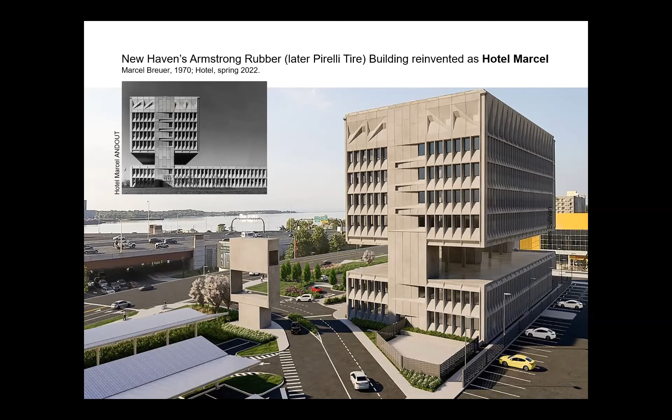Down in New Haven, the Pirelli, as it was known—it was the Armstrong Rubber building, then the Pirelli Tire building—vacant for at least 20 years, has been reinvented as the Hotel Marcel. I can't wait to visit. It was named Marcel after the architect Marcel Breuer. The space between the upper and lower was ostensibly to divide the administrative corporate offices from other functions, but it also, as you can see with the raised highway, the expressway, allowed view through, because that was the level of New Haven with its highway systems coming through. As commentators and historians have discussed, it's a different type of brutalism than say the Yale Art and Architecture building—a little more harsh. But in any case, the other amazing news is that the hotel is net zero. It's got solar panels on the roof that supply all of its power, and enough to actually at times sell back to the grid. I love the sculptural quality of it itself.

Who's doing the redevelopment? Let's see. Well, I know the architectural firm was Becker—Bruce Redmond Becker. That works. I'm just looking at the Globe story, I don't recall it mentioning the development team. I probably should have, but anyway, they're looking for LEED Platinum status and Passive House certification. Some of you guys know much better than I.

Next up was the sale. There was a lot of concern over the last couple of months, and Governor Baker was really fast-tracking selling the Hynes Convention Center, which would help finance expanding the South Boston Exhibition Convention Center. There was news a week or two ago that it's been postponed, and the Senate put the brakes on that, saying let's get it studied and take a look at all the pros and cons. Hopefully that would include saving at least some of the existing meeting space. That's certainly enlivened the Back Bay.

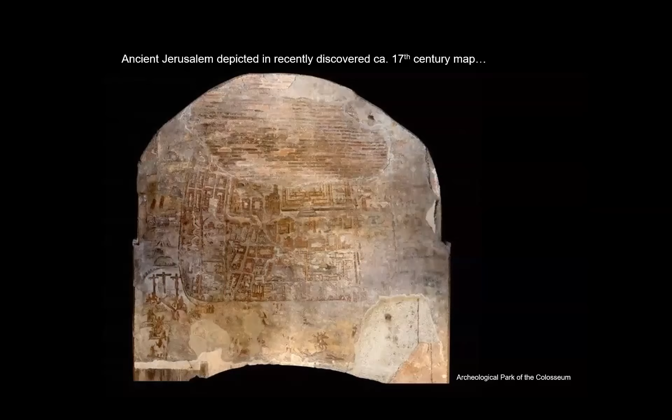From that era, just over a doorway, there was this map that had been so faded no one had noticed it until recently. They think it's from the 17th century, but it shows ancient Jerusalem. From whatever records they had then, it's a map which really reinforces the connection of the Colosseum being used as a sort of holy site of the church.

The cross is there, in the bottom left - isn't that great? Yeah, Calvary. Crosses on the bottom, lower left. So there's some figural aspect to that. I haven't actually looked at how that worked with my recollections of the layout of the city, or which way is north, but that would have been all the old city at that point, I guess.

Anyway, so that's what I have. There are some others, if time permits, but I'm going to stop. We'll stop sharing, but I want to just - that one, not sure what that is. So David, why don't we bring you up. Yes, please.

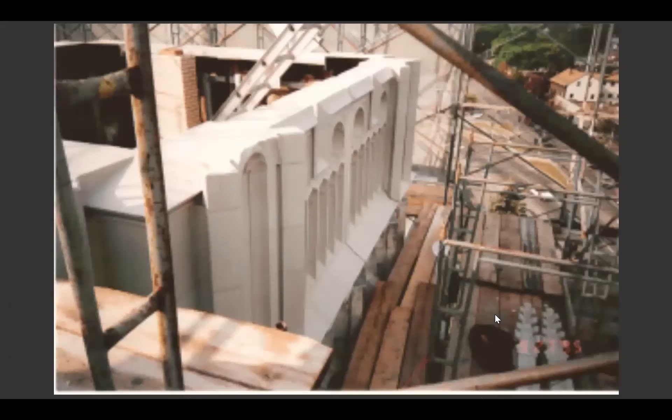And here it is being hoisted up. You might not have known this when you're driving by on the Pike, but this project, which Judy Selwyn oversaw, and Durafiber in New Hampshire built, recreated everything above the gutter line in GFRP, with the rest being masonry. So that's a really good use, and I use that as an example for my next project.

Now, this building everybody knows. Do you know what the framework is? Up in there, there's some steel framing mounted to the masonry. But otherwise, those pinnacles are self-standing.

See these pieces in the shop? They just get screwed together very easily. They're very flexible, and they put the joint lines in it.

This building here, notice the bottom, which we saw when I originally moved to Boston, and here it is, the older picture with those pinnacles and balustrade. Notice how it's lost a lot of its character, but with Feingold and Alexander's project and the revitalization of this building, there go the new balustrades cast, and ta-da, there it is, in all its glory, even with the flagpoles.

And where's the company that's doing the casting? This was done by FiberTech in Greenville, South Carolina, which did the GFRP work on that. I talked to Mr. Alexander about this, and he lent me these photos to show.

This is another one of their projects. This is the postcard of the Worcester train station, which looked sad and highly pixelated before the renaissance of this building happened.

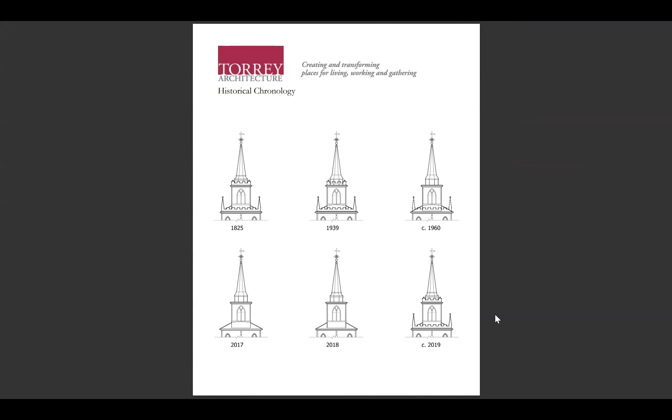In that 2018 version, we decided that if you're going to rebuild and recover it, don't just strip the shingles and put more shingles on — that's going to require constant maintenance. Let's do GFRP. Notice the spire framing goes right through, and that was in pretty good shape. So what happened was, notice the spire framing and shafting going through.

So we designed the drum and the spire in the original curved transition shape. They stripped the thing and then carefully dropped this cap over the top of the original framing, including the weather vane rod. Dura Fiber helped us with this project, and American Steeple were the guys who got that on there. That was First Parish, Canton, Mass, and that's the first phase of restoring.

On a much smaller scale, here's a balustrade at an entrance to a house in Hingham. Actually, it was relocated to Hingham as a historic sea captain's house. Notice the little balustrade, those turned balusters over the entrance. When we got to this house in Hingham, the balustrade on the roof just looked like a garden gate fence — inappropriate and inaccurate.

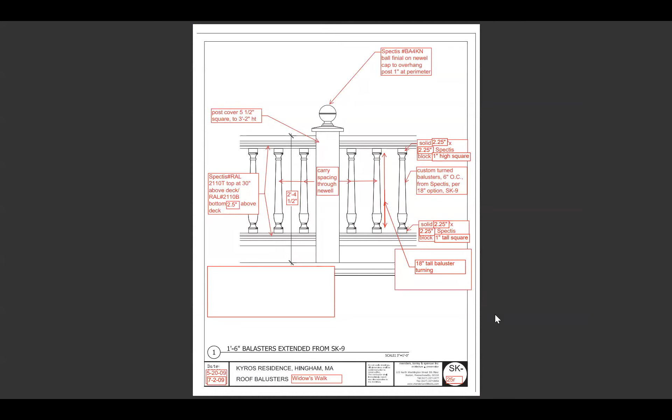So we went back to historic documents, and we also took the dimensions of the balusters that did survive and extrapolated that up, and now the new Widow's Walk in the original design has the same turned balusters. This is in Spectis, which is a form of plastic. They're custom-made balusters, and it's pretty easy — you make a mold and you make a lot of them.

Within Susan Scher's compendium of what would have been the conference, there was a preservation brief we should all know about, number 16, use of substitute materials, and it has several pages. The bottom half of this page is the fiber reinforced polymers page — advantages, disadvantages.

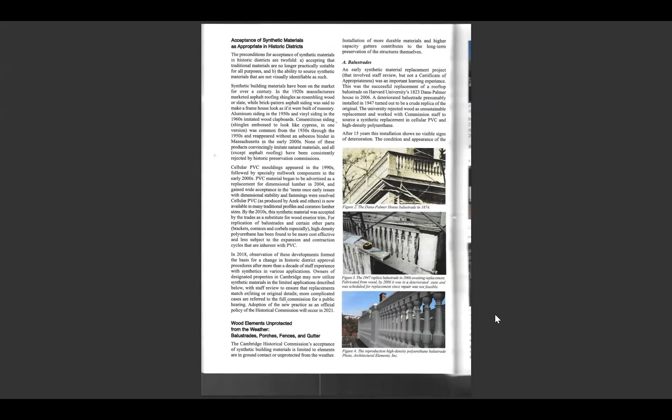In the same book, Charles Sullivan, director of the Cambridge Historical Commission, wrote a piece — and you might think historical commissions are totally against using non-original materials — but he has a piece showing the wood grain of old white pine and new white pine at the bottom of the page, and issues with these things. Do you ever try to find an original balustrade on a colonial house? It's really hard to find them because of all those reasons.

But historical commissions are able to approve them — for instance, there's the gutter profiles. You can get a fiberglass gutter that holds a lot more water, has the same exact profile, and doesn't rot.

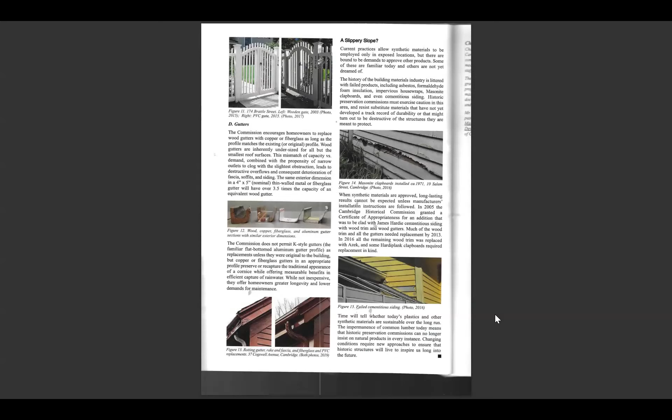Isaiah Rogers in 1833 designed First Parish using high-tech bandsaws in wood. In 1833, old-growth wood was a plentiful resource in New England, and skilled craftsmen were able to saw it into boards and piece it together into forms evocative of stone. Early Gothic Revival did not rigorously copy carved stone European Gothic examples, as did later 19th-century work by, say, Viollet-le-Duc.

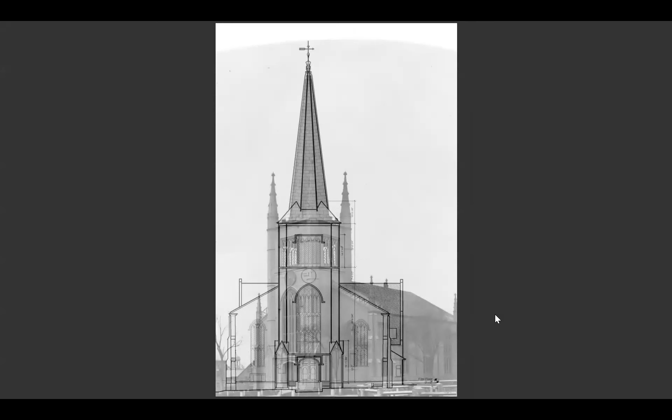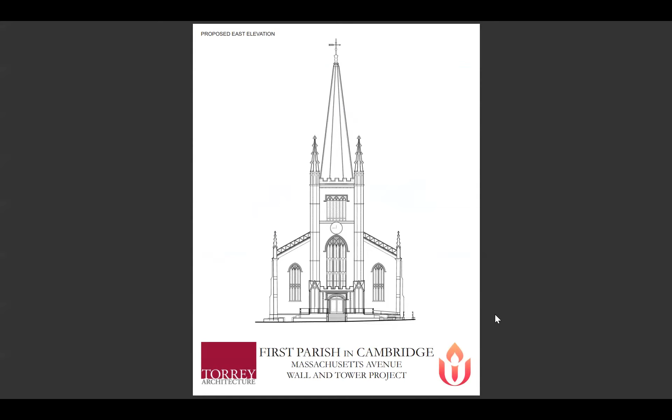But a lot of it remained. So first we had existing conditions come out and do their laser scanning. For the first time, we can actually measure the dimensions, overlay on a 3D model, and carefully recreate the entire building in CAD as it was, accurately enough to be approved by Charles Sullivan and the Cambridge Historical Commission to go ahead with this project, which combines accessibility, a new entrance door with ramps, and restoring the original building to its former glory.

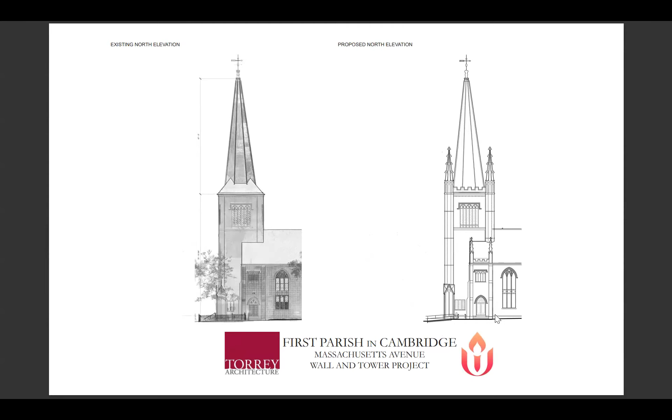Notice the strength of the tower with those four corner buttresses rather than this sleek, thin thing. You can see where they lopped them off. There's lines lifted over. So we were able to compare photos and three-dimensional modeling and actually draw this thing to be restored.

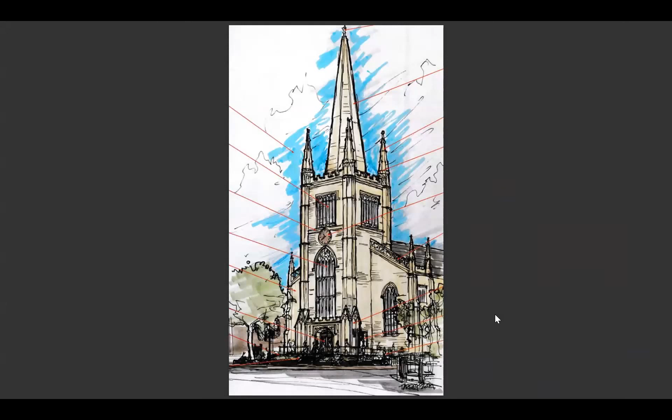All it takes is a thin armature, and you strap this skin onto an armature. We think it would make quite a wonderful return to the skyline of Harvard Square. That's the story of that project, and so we're looking for funding.

Bravo. Yeah, very exciting. All right, it's a great presentation, very interesting. Thank you. Very.

Shall I go? I just want to jump back on because I had some of the projects that's sort of inspired by, well, all right. I was sort of inspired by David's work. There was a little church, a little thing I did that I wanted to show, but okay. Thank you, I guess, Matt. Matthew, stop the share. Yeah, Jack, did you want me to go? I've got a hard stop at 9, or do you want to go now? Oh, I see. Yep, carry on. Yeah, Matthew, okay, why don't you share? I forgot about that. Thanks.

Okay, for reminding me. So I just wanted to share my rather geeky love of stone paving and talk a little bit about that. So historic stone street paving. Can everyone hear me okay? Yeah, great. Okay.

So, the trajectory of my own geeky love of this: years ago in the late 80s, I was educated as a civil engineer and worked as a highway engineer for my first couple years out of school, mostly assessing and designing repaving projects on the Mass Turnpike. Then since I joined SGH in the mid-90s till now, I've done a lot of stone paving design over the years, although most of it hasn't been vehicular. It's mostly been pedestrian or occasionally light vehicular, a lot of university and college plazas, terraces, and balconies.

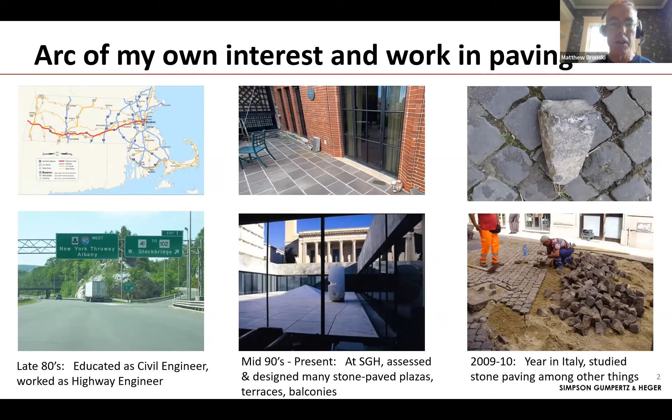During that time, about a dozen years ago, when I spent a year in Italy as part of independent studies, I looked at a lot of different stone pavings. There were just so many different systems in the streets of Rome and surrounding towns and piazzas. So that was a fun way for me to geek out while I was there.

There are other types of paving you see in other parts of the world. But a couple summers ago, I had the good fortune to really dive into this love and do a little study in the summer on the historic cobblestone Main Street in Nantucket Island.

Over the years there had been periods of ups and downs where they spent very little on the streets, the cobbles were really well laid, maintenance costs were really low, and they were bragging about how little it cost compared to bituminous. Alternating with times when they were just complaining: oh, these cobblestone streets have got to go, they're such a pain, no one can keep them up, no one knows how to deal with them anymore.

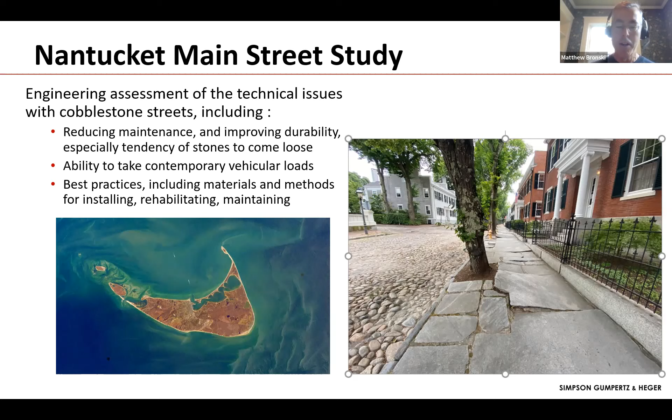They're kind of at the end of a down period now—hearing a lot of these complaints, with people wondering, gee, is it really practical to keep these streets up, et cetera.

Part of this was on-site assessment, and part was technical literature search. One interesting thing is that in the period from about 1870 to 1910, there was really good engineering research and publications coming out of US universities, and also Italian, English, Irish, on how you really do stone pavings and make them hold up to vehicular loads. This was in an age before bituminous concrete pavements were widespread, so that's really where the engineering research of the day was going.

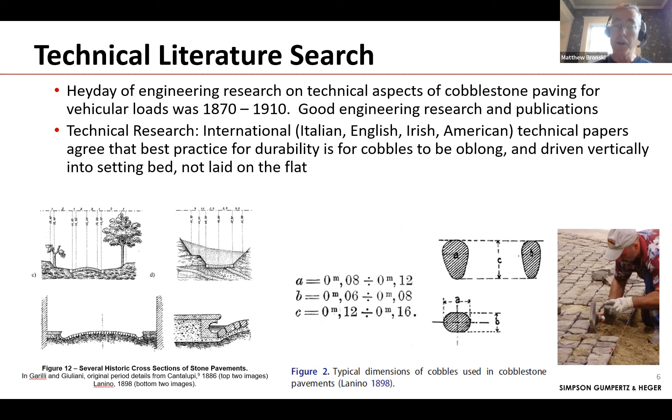There are some great publications—I'm showing a couple of Italian examples here, looking at the ideal dimensions and aspect ratios even for cobbles you're picking up out of the ground, carefully selecting the ones that will work best, and how to set these.

This was from a more recent English paper where they reset the cobble paving at Radcliffe Square, Oxford. It had failed pretty badly. They reset it improperly at first, then realized that people had been laying those stones—imagine the ones on the right are kind of baked-potato shaped—laying them flat instead of driving them in vertically. From everything I'd seen in Italy, and from older properly set cobblestone pavements here in New England, that's how you have to install them: driven in vertically, with every cobble tight to the one around it.

So even though you don't see that on the surface, subsurface they're all in contact. So wheel load on one, especially as a wheel is spinning and it's trying to torque that cobble out of the ground, if they're in isolation, if they have sand or mortar all around them, that one stone is the only one resisting that force. But if they're all in contact with each other, it gets spread to the 5 or 6 adjacent to it, and then the 10 or 12 adjacent to that, and those stresses are distributed over a much larger area.

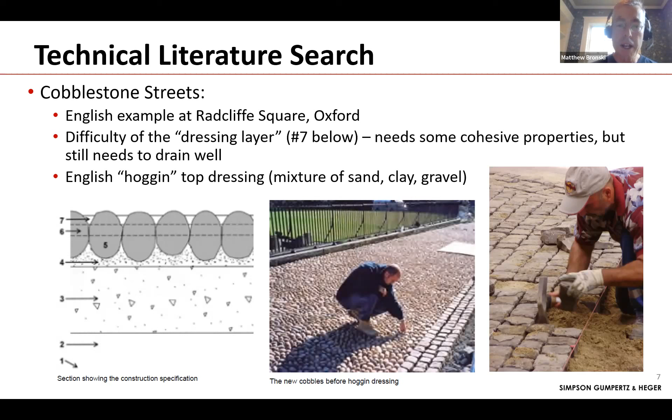Typically they've used a mixture of sand, clay, and gravel - materials and soils that we would define as a mixture of cohesive materials like clay with non-cohesive materials like sand. The non-cohesive materials drain better, but the cohesive materials hold together better. So they're creating the Goldilocks material, the perfect material, out of combining those cohesive and non-cohesive materials.

Traditionally what was used on Nantucket was their local dirty sand. What you mean by dirty is it isn't just washed clean sand like you would get at the beach. It's the sand that you dig a hole in Nantucket and you find this everywhere - sand that's actually mixed and combined with some amount of clay or silt.

Digging back into these turn of the century volumes and engineering research, that's exactly what they were recommending. Morrison in 1908 and Tillson, a really great handbook from 1900 - these are university professors, I think Tillson was from Columbia in New York City - saying what you really want is loamy sand.

Looking up loamy sand, it's defined on the classic USDA soil triangle. Any soil, what you dig up in your yard or your potting soil, you can simply classify this way. Each of the 3 points would be 100% of either sand, clay, or silt, and then any point on that triangle is some combination of those.

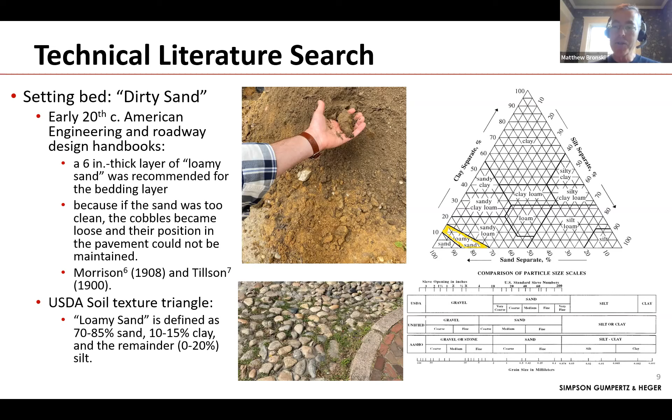So looking up, what did loamy sand mean in 1900 or 1908? Well, it was essentially 70 to 85% sand, 10 to 15% clay, and the remainder, if any, 0 to 20% was silt. So again, it's mostly sand because drainage is really important in roads, but it's enough of the cohesive stuff to hold it together and stick it together. And that helps make it compactable as well, which is a key thing.

Some of the problems on Nantucket on Main Street where they've had issues - you can see their detail here from some of their recent specifications for the town are actually pretty good. They're showing them like baked potatoes or molars, driven in vertically like they should be. They even show them touching, so the spec looks pretty good.

They're using stone dust instead of a dirty sand. Stone dust compacts really well, but it does not drain well. And they weren't really installing it this way - you can see over here on the left where they've had all these cobbles spun out. First of all, they're not always picking the right ones.

It should be like a baked potato, it shouldn't be shaped like a cantaloupe. A lot of these are just perfectly spherical, and those tend to spin out. In the top photo, you can see this is an older area that was set really well and that's held up really well. Actually a lot of these are flat topped, which they used to find on the island - they knew exactly where to get the long stones that were flat topped.

On the bottom, this more looks like a sea of icebergs. So not only does it look terrible and non-historic because the stone to fill ratio is way off, but just by looking at that, you can see that subsurface, these aren't going to be in contact, right?

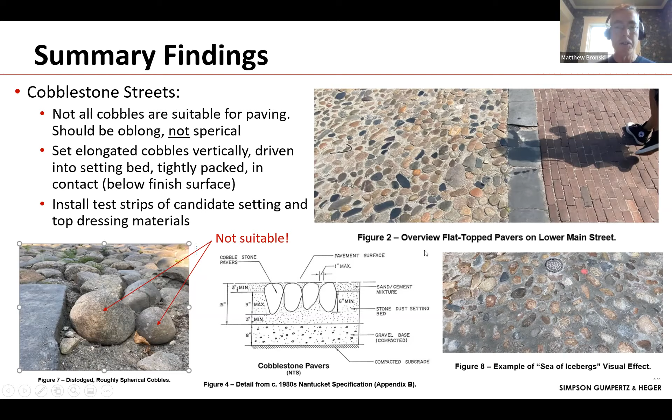So they're going to spin out a lot easier as someone turns their wheel. All the force is going to be isolated on that single stone.

So kind of just to wrap up, my findings down on Nantucket, cobblestone streets, kind of the world of paving and AASHTO and federal highways: all streets, even your local roads, tend to fall into two categories, rigid paving, like concrete, or flexible, like bituminous concrete, which a lot of people would call asphalt, even though asphalt is just the binder in it. And stone streets are really like a hybrid.

They're extremely rigid individual units on the surface, but the joints between them actually give them a lot of the characteristics of a flexible pavement, where it can accommodate subtle areas of settlement and tree roots and things like that, and roll with those punches. And most of all, they're pervious, so that if you pick the right material between them, like a dirty sand as opposed to a stone dust, they really drain water well.

So that's, in my mind, a reason we should be thinking about these today: just the sustainability of having pervious pavements. And they can withstand contemporary vehicular wheel loads. All the research, including the European research, supports that. The surface is actually more rigid than bituminous. The capacity is really all about the subbase, how the subbases are chosen, the layers, and how well they are compacted.

And that's really where the ability to support wheel loads comes from. The most significant load that was displacing cobbles there was really the torque from turning wheels. The absolute worst case is when someone parallel parks, because when you're moving and turning, like slowly taking a left turn, that's not so bad. But when a car is totally stationary, with all the weight sitting there, and someone cranks the wheel really hard to one side to get into or out of a parallel parking spot and the car's not moving, you're concentrating it all on a couple stones, or even a single stone, right underneath the wheel.

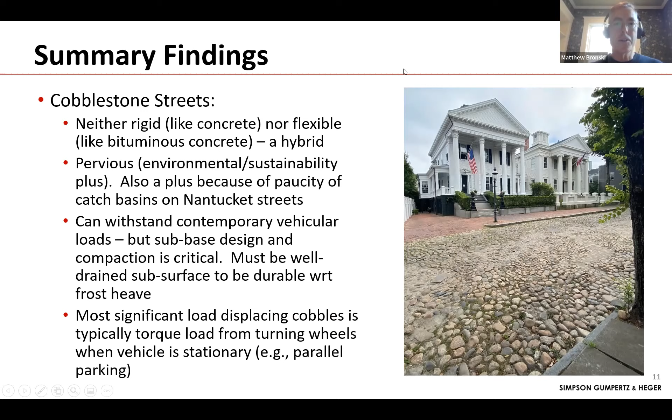So that was it. So I'll stop the share and let you get back to it, Jack.

Great. Thanks, wow, cool. Yeah, just a quick question.

My understanding is that cobbles were often used as ballast aboard ships in the 17th, 18th century. And so in Nantucket, might it be that some of those were— after the load was unloaded, the ballast would be emptied to make up for that. Is it possible some of those were imported? That story persists a lot, and everywhere we keep hearing, oh, these came over as ballast from ships from England or elsewhere. But you look at those stones and they are all just the local New England glacial till. So I think there's a lot of mythology about that. The physical evidence just doesn't support it.

All right. All right, thank you. Well, good to know.

I know that there's a park in Charlestown that has ostensibly cobbles that came off of the ship, but I don't know if that was embellished as well. Yeah, I think if we see flint anywhere, we'll feel pretty good that it probably came over on a ship from England.

All right. So, Dan from AHA, Dan Whittet, you're on. So I'm going to talk a little bit about Lidar scanning of a historic building.

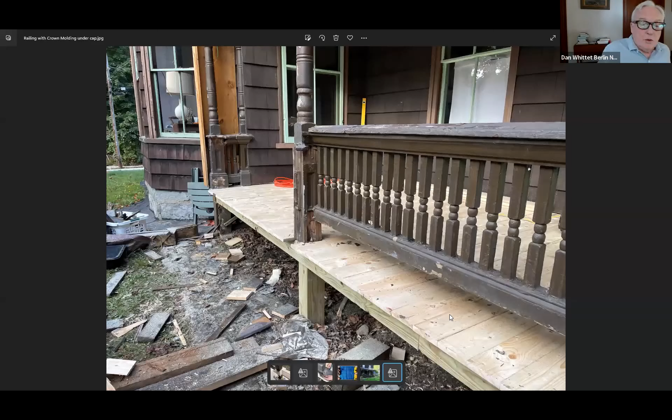So when I got the house, speaking of balustrades, the leftover turnings from this original railing were here. Everything was exactly the way the house had been for 130 years. Do you see that detail there? Yeah.

So I decided that I would apply for historic preservation status for the house, and I wanted to get obviously full measured drawings of the house.

Do you see this 3D model on the screen? No, not yet. I apologize.

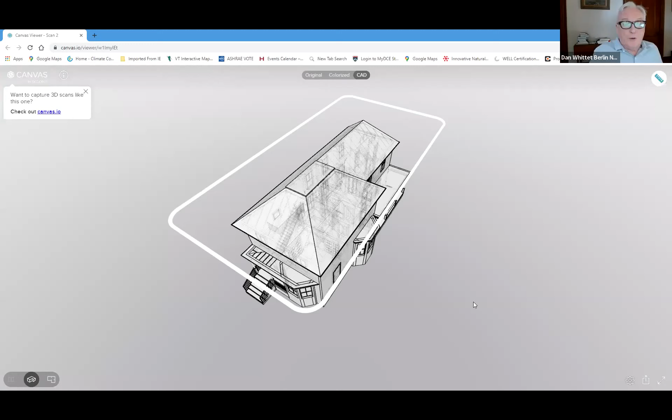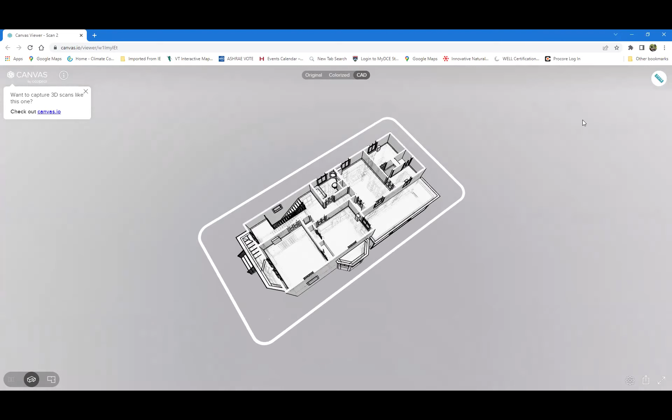So basically if all of you have an iPhone 12 or later, or an iPad, there's an app called Canvas. Canvas allows you to use the Lidar function, which is what does the facial recognition. You walk through a building and do a scan, and then it exports as a point mesh. Then the company, Occipital, will export it back to you for 15 cents a square foot as a full measured drawing. I'm having a little bit of difficulty with my Zoom screen here, but this export allows you to measure, and it's exactly to scale.

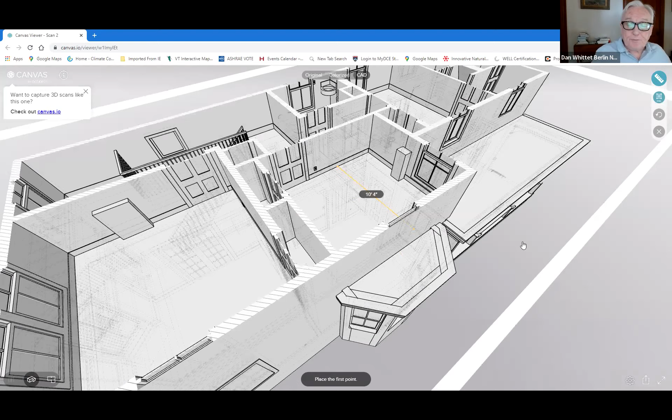That's not really the outstanding part about it, although this was extremely useful to me. And by the way, the app itself is free. Actually behind me, you can see these tall wooden doors - this is the room I'm sitting in. In fact, right behind my head, that's that door right there. This is accurate within about 1/8 to 1/4 of an inch everywhere.

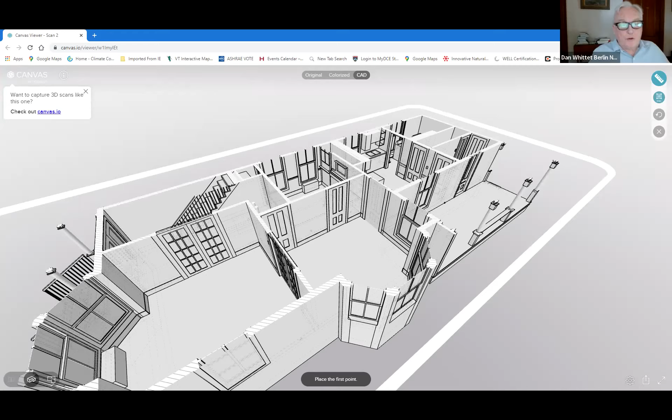I'm going to again try to switch screens. It exports into a Revit file. I'm no great expert with Revit, but you're then able to create from that model a full Revit, AutoCAD, and SketchUp model of the building.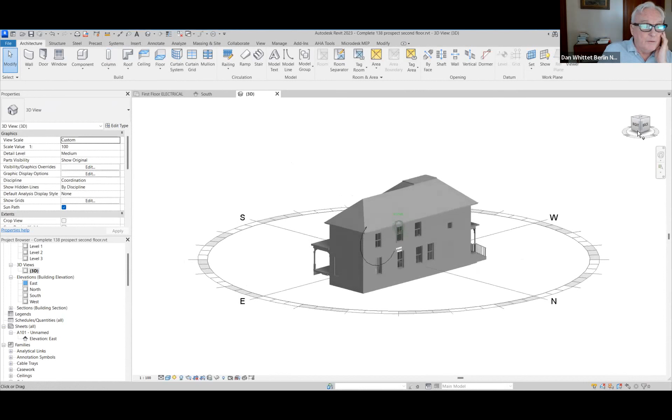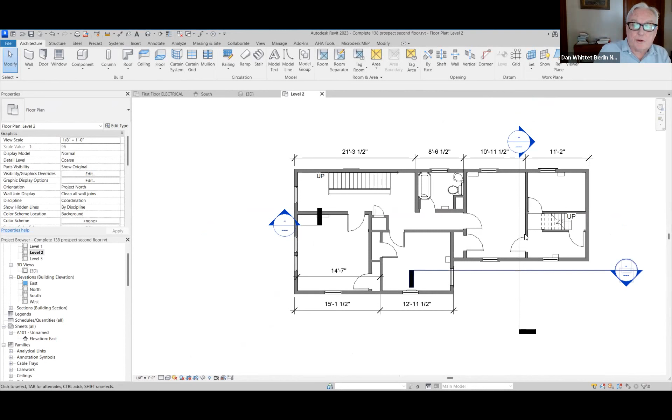I thought, wow, this is really convenient for me, because I want to be able to go through these, and I have photos of the interior, but it's a perfect match to the building as is. In fact, if you think of that original drawing that I showed you, the dimensions all line up. It's a pretty interesting workflow.

What it takes is maybe an hour and a half to walk through the building and do a scan. In fact, I will give you an example of one.

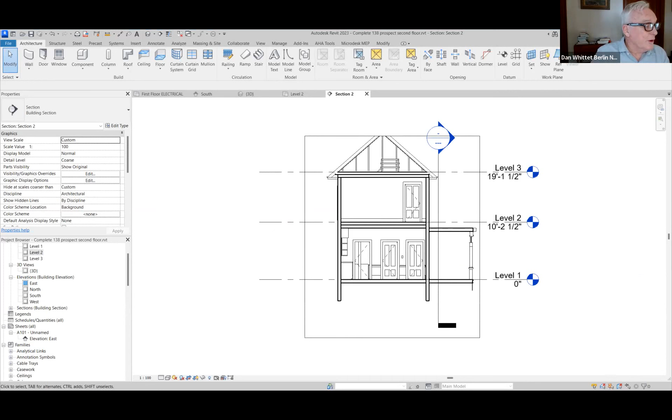By the way, yeah, all the other presentations were fantastic, guys. Thank you. I've been involved with BSA for a decade, and I didn't know this group existed.

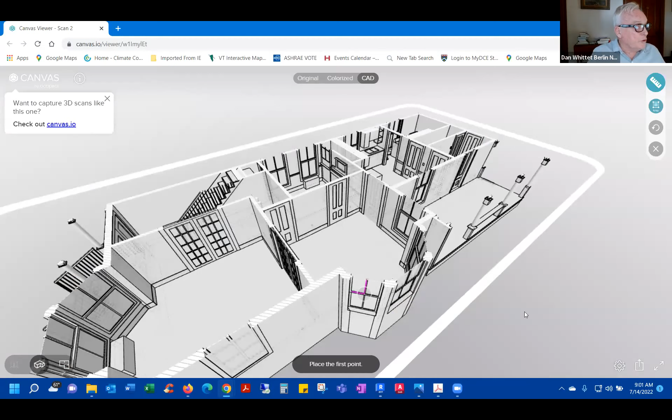I think I know what I need to do - I need to move this to this screen. Now you see the 3D model. It just blew my mind. And there you go - see the mantle in there?

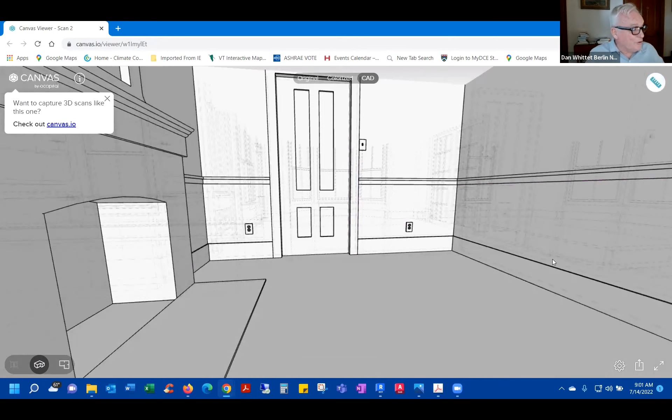Yeah. And in fact, when I came back and field checked this, these are accurate - I mean, the dimension of this outlet is actually in the room. By the way, part of how they're doing this is they take the point mesh, which the Lidar generates, and I could show that to you if you had time to see it. They export it to people in Ukraine, interestingly enough.

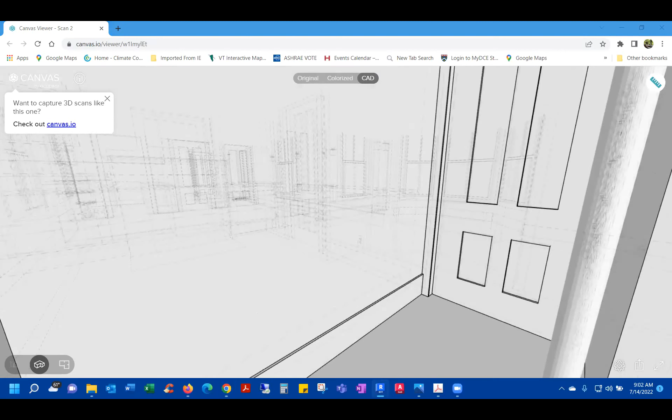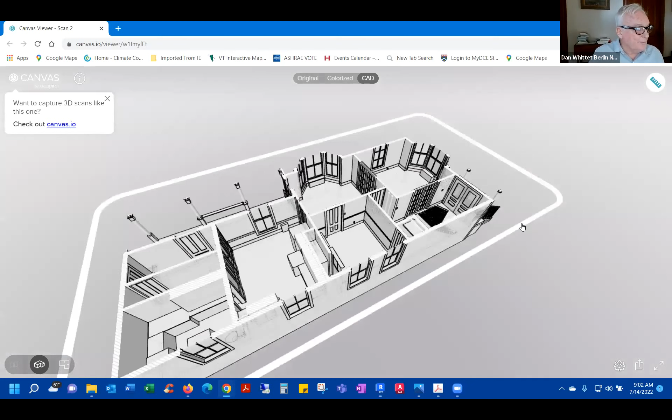And so they're Revit modelers and are very careful about it. I was impressed when I looked at the layout, like I went through the attic, which I used a New Hampshire Saves program to insulate with closed cell foam.

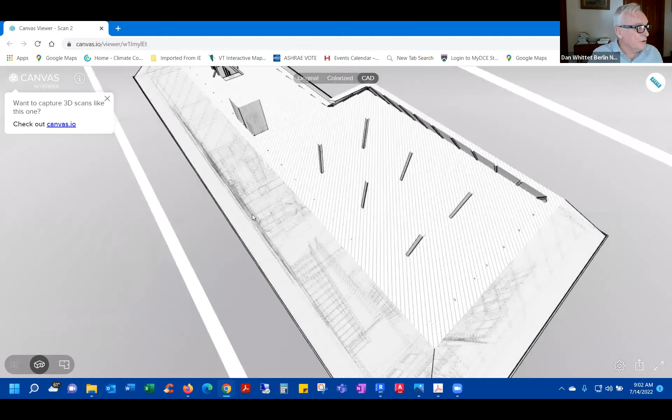I had a photograph for you of this back staircase that will show up here. It's a little tricky moving it around, but you'll see a back staircase there. There's that back staircase, and it came out perfect in the CAD model.

So I think this is a very affordable and very useful tool for making measured drawings of historic structures.

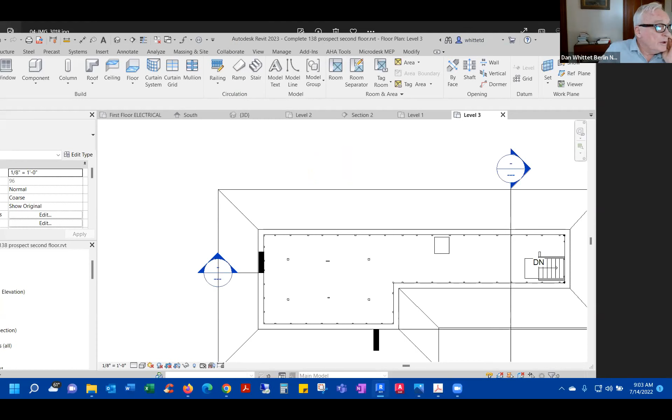Oh, cool, that's Canvas? It's Canvas by Occipital. It also generated, it's not particularly beautiful, and I don't have the SketchUp running, but when they give you the file back, you get Revit, AutoCAD, and SketchUp.

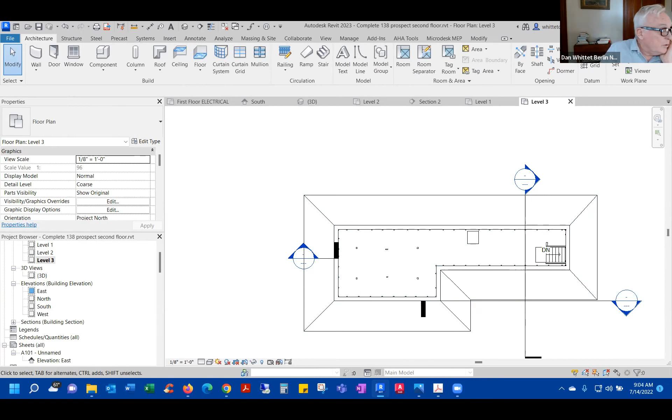And I have links to the company. I spoke to them about this presentation, and they have a... let's see if I can land on this real quick. Sorry, I didn't set this up as a PowerPoint because I wanted it to be dynamic. So this is the company, and they have a whole lot of links on their webpage. I can put a link to this in the chat to talk about the process.

So that's it, other than to tell you that as I hear about things, because I still work for AHA out of the Lexington office, and I'm down in Boston a lot. As a point of interest, I was the lead admin for taking that building that the BSA is in through LEED and getting their LEED Gold certification.

Here's another photograph of that balustrade that's being restored. And thank you for the GFRP presentation, because I'd be tempted to do that, although as a woodworker myself, I enjoy the project of trying to recreate it.

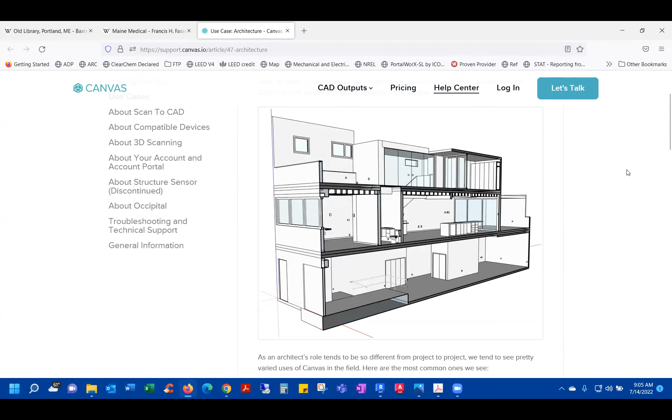Yeah, well, I was all set to go through and measure it and begin drawing, and started to draw it, and then I didn't know how this would work. When I did that scan of the, there's another facet of the building, I thought, well, this is interesting, but it's not that useful. But then when I exported it to them and they sent me back the model, that really is useful.

Particularly being able to get measured drawings, because now I can begin, as you know, with old houses, laying out where you're going to do restoration and where you're going to run wiring that has to be upgraded, things like that. Some of the drawings I saw on the GFRP presentation really impressed me, but to do a full set of measured drawings like that is a really expensive process if you're hiring somebody to do it.

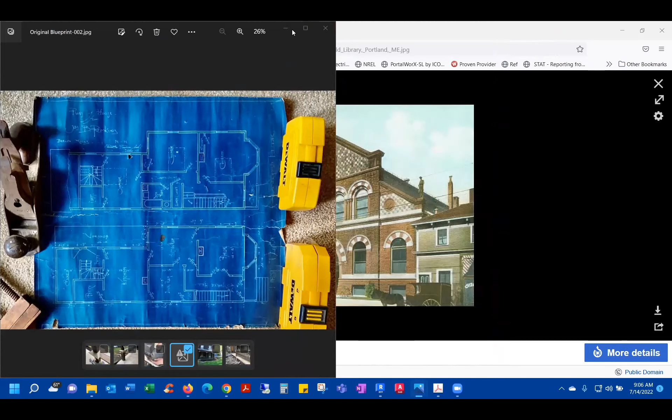Yeah, another benefit for buildings within the national park system that are historic houses. So another benefit is programmatic accessibility, like a house I'm working on in Long Island, the William Floyd Estate.

I'm going to show my model if there's time, but there are lots of level changes in the upstairs. It's not accessible. So a way to make the 300-year-old occupancy of the house, part of its history, is to make all the other rooms accessible to visitors where physically they can't go. So being able to have a detailed model and panning around is a benefit too.

Yeah, it's a really easy to use tool, and the company has been very helpful. I see all kinds of applications. AHA has gone out and purchased an iPad to be dedicated to this so that we can convert it to our BIM files.

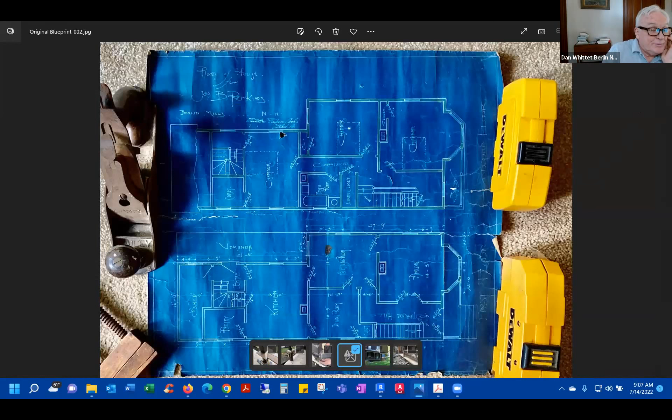Like all of this stuff, when you saw my scanned model, it picked it all up. And by the way, happy to entertain discussions. These are all shellac covered floors, and I'm sure people have lots of opinions on the best way to restore an old house like this, because I do hope to keep it as original as possible.

All right, well, let's keep in touch. Thank you, Dan. That's great, yeah. Sara, do you mind if Susan jumps in, since she has a time crunch, and then we'll go to you, Sara, after.

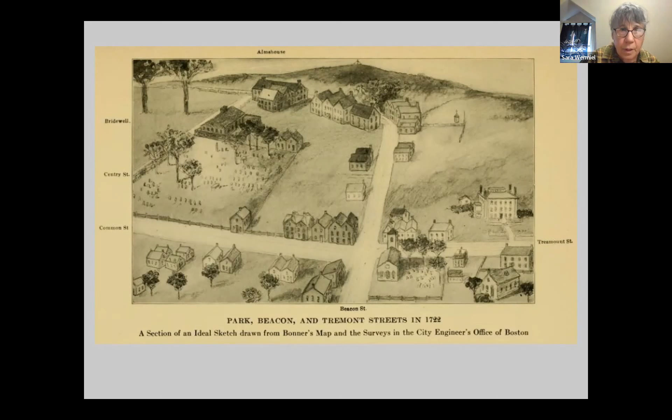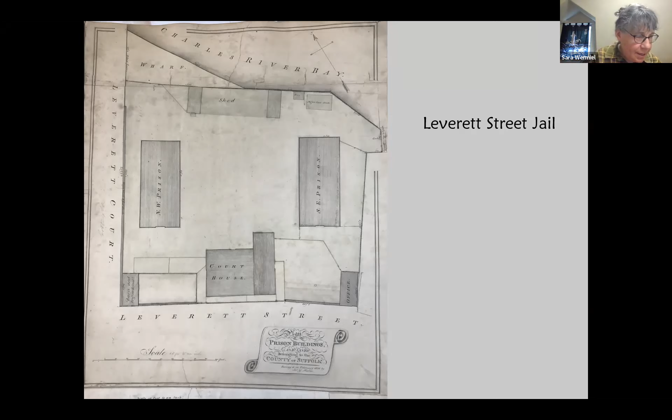Meanwhile, that little decrepit prison on Court Street was replaced with this jail, just down the street from the Alms House on Leverett Street. It consisted of two separate prison buildings with a courthouse and keeper's house in between. One reason there's no drawings or photographic evidence of these buildings surviving into the period of photography is that they weren't publicly accessible, any more than you'd visit and photograph a prison today. They were surrounded by walls, so you couldn't really see them from the street. So they were obscure.

Now, when they demolished the Alms House near the common, and the workhouse, they didn't replace the workhouse. So that whole population moved to the Alms House, which should not have been the case. The Alms House was for the deserving poor, and the workhouse was for the undeserving poor. So the city had no workhouse, and moreover, at this Alms House there really wasn't a place for people to work. So they really needed a new workhouse.

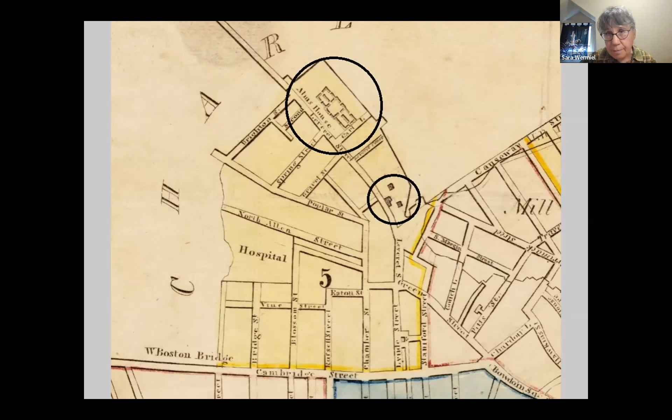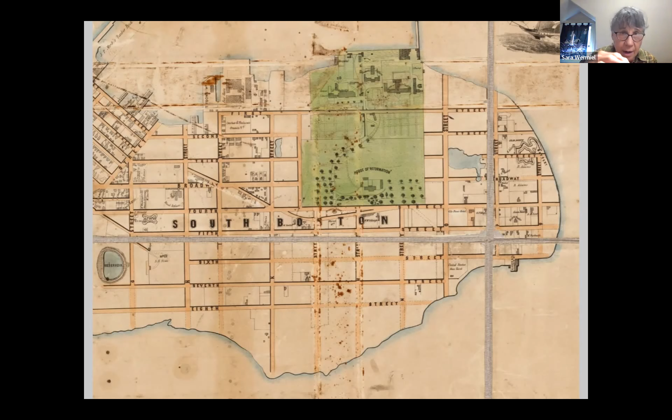Anyway, about 1821-22 the workhouse was built, but eventually other institutions were built, as I'll show you. Four institutions were built at this site, which became known as the city institutions. On the upper tier there is the House of Industry, a building called the Lunatic Hospital, and then a House of Correction, and the lower part is the House of Reformation. I'll tell you about these.

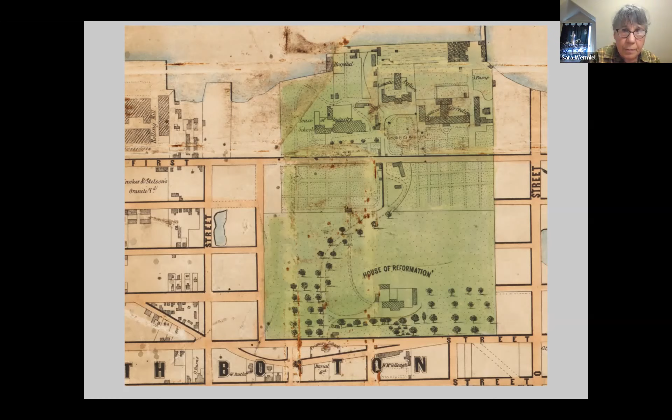So the House of Industry was built about 1821-22. Again, it was supposed to be for able-bodied poor. But after it was built, the city tore down the Alms House, or rather sold that piece of land, which had become valuable at that point. And so the entire population was moved over to the House of Industry. So it became the House of Industry Alms House again, recreating the problems that were in the Alms House.

The Lunatic Hospital was the next institution to be built. I should say that in the meantime, in 1826, an institution for juvenile offenders called the House of Reformation was set up, and that was put in the House of Correction. So that was a department in this building, but it later got a separate building, as I'll mention.

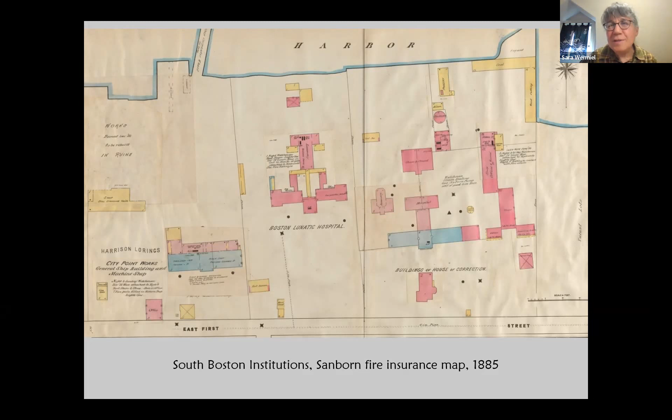And it was sold and made into lots. And the only thing that survives of this whole city property is a park that's now called Medal of Honor Park, and all this is private land now. For all of these, there's not a shred of legacy except in the name of Court Street, which was the site of a courthouse and the prison. So this is just for Jack.

Thank you. Thank you. Thank you. Interesting.

I was thinking, trying to remember the Philadelphia example—the term, was that 1820s, the term penitentiary comes in, and the idea of it's not prison but it's penitence. Well, that was 1790, and the first penitentiary was built. And yes, formerly, like in the jails and even the Alms House and the Workhouse, people were kept in dorm rooms—big rooms, so all different kinds of people were kept together. So it was considered a big advance to have single cells, so people didn't have to deal with all sorts of other people.